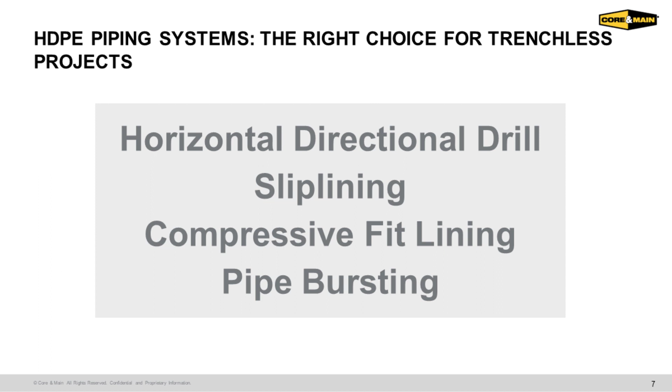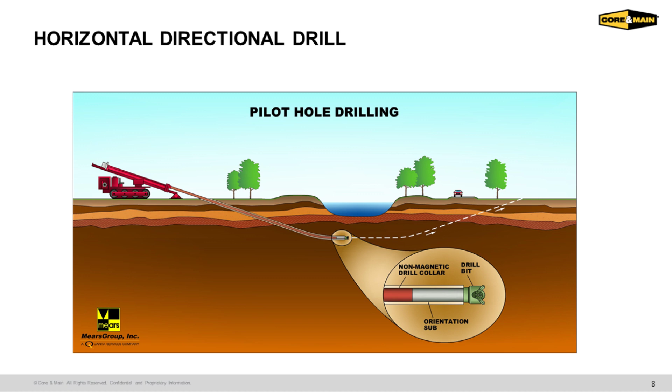Keep going. In horizontal directional drill, essentially we are crossing some type of obstruction, whether a foundation or a river or water body, which is the most common. We are installing a new utility, drilling a pilot hole at a sufficient depth underneath that water body. We make sure during this pilot hole drilling that we're locating where we're putting the drill in the appropriate place. Consulting engineers will design a bore path in advance based on information they collect about that project to make sure we've got a safe and sound route, and then they'll start the process of going through the horizontal directional drill process.

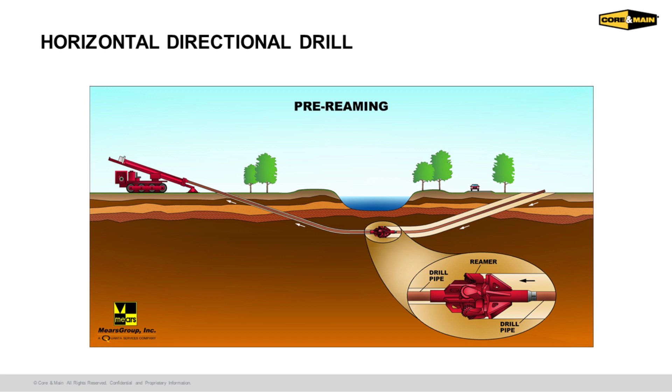Once we have that original bore path in place, we start to pre-ream or cut through that hole itself. Use of bentonite, which is essentially a very moist specific clay with lots of additives that are the secret sauce within the industry, helps us remove material within that bore path so we can start expanding it to the size of the high density polyethylene pipe we're using to replace it or install into that bore path. Once we have sufficient bore path area expansion, we attach the replacement pipeline and pull it back into place. For all of these processes, the limiting factor for the allowable radius is never the high-density polyethylene pipe. It is the ability of the equipment putting in the drill string, and the actual bend radius of the drill string, that limits the ability to install the high-density polyethylene at the depths or curvature we're looking at.

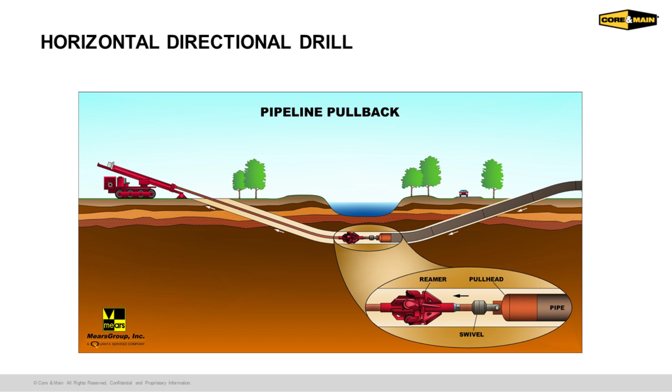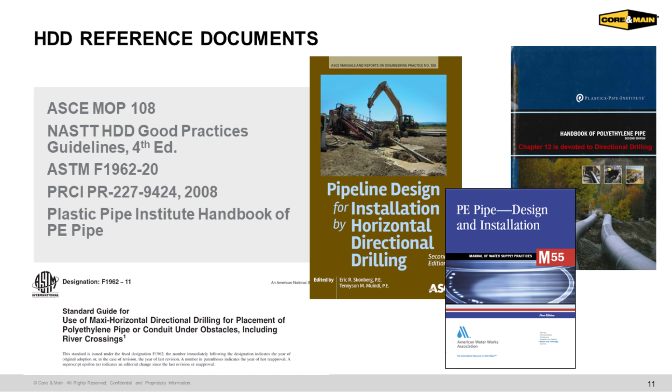Now, when we're looking at very long lengths of horizontal directional drill, we want to look at the tensile forces that can develop within the pullback as we move through that, and compare them to the allowable tensile forces for high-density polyethylene. There's lots of great references for you out there. NASTT's HDD Good Practice Guidelines 4th edition is a great book. ASCE has a manual of practice for you. ASTM standards, there's lots of great stuff out there. The Plastic Pipe Institute Handbook on Polyethylene has an entire chapter dedicated to horizontal directional drill. The Alliance has taken that a little step further, and we have specifications and spreadsheets for you to look at some of the most common calculations you'd be using here.

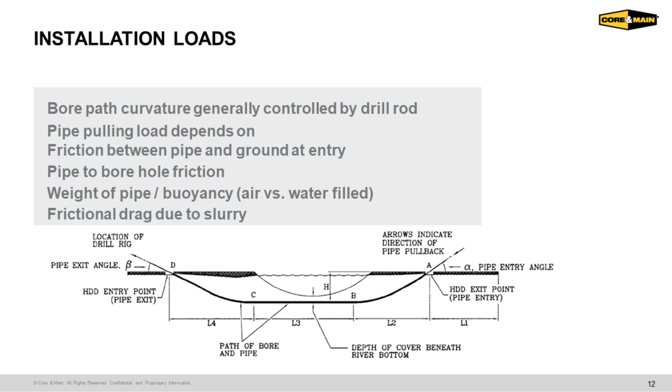So where we're looking mostly at tensile forces as they develop through pulling this pipeline into place is that curvature you'll see developing between L4 and L2, points B and C, where we're looking at friction forces along that curvature. So that's where we want to evaluate pullback friction forces against that curvature and make sure we're able to address that. There are several different techniques, like buoyancy and ballasting that pipe. You could fill it with water to make sure it's heavier as it sinks, which develops less frictional forces as we move through it. There are lots of great tools and reference documents out there to take a look at those forces and what they may be as we develop.

So again, from the process we worked out for the very first 3 slides, we're essentially going to start on one side. The difference in sizing we get to is around 12 to 16 inches. Under that becomes a mini HDD rig, and above that becomes a maxi HDD rig. They all vary somewhat in size and the tonnage they have for these directional drills, but the process is essentially the same as we look through this.

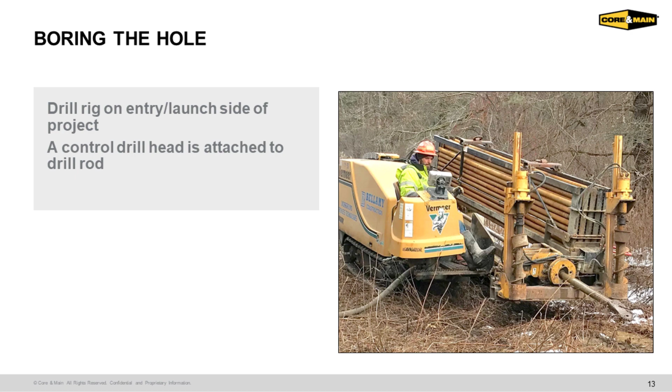So we're going to use that drill rig with drill string. Those are threaded connections as we go through that, so we want to make sure that they stay well maintained and lubricated as we're pushing that head through. Now, this is the smart head at the front of this that's being able to be located as we start to drill that original bore path.

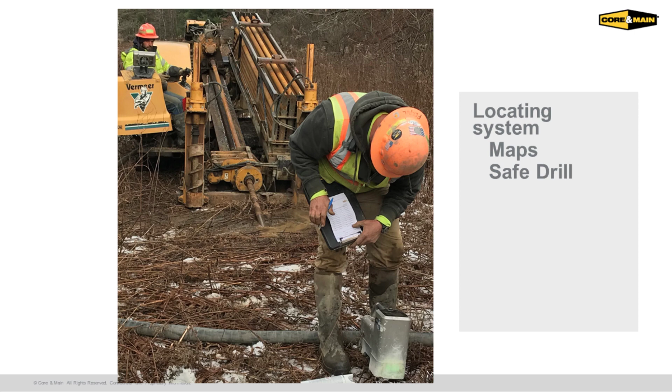What you'll see here is that locating device. It's often a 2-person crew here that moves along. This gentleman with the inspector against the ground is really tracking the vertical and horizontal locations of that head of the drill string as it moves through, so they're able to calculate and see if they're following that designed bore path to make sure the bore path meets the design requirements and bid documents that allow for the specifications of the tolerances for what the drill is trying to achieve.

So while we're looking at this, ductility becomes more important than strength of the pipe as we're pulling through. So obviously when we are starting to get at the end of that bore path where we have the diameter of the borehole reamed to where we want, and we're starting to pull that pipe back through there, there's going to be some lengthening of the high-density polyethylene material as it pulls back.

So when that drill is actually completed, we want to give ample time for the HDPE to relax as we go through it. It's a very common practice to fuse on longer ends of the horizontal directional drill run that we've got, to allow that to relax. Typically that happens in 2 to 24 hours, so we wouldn't reconnect at the final connections in that time period.

But as you're seeing here, 50% of all of the drills we're looking at are high-density polyethylene. That's from small conduit, which is quite often used, all the way up to very large diameter force mains, potable water mains, and things of the like. We'll show a case study on a 54-inch force main here in a few minutes as well.

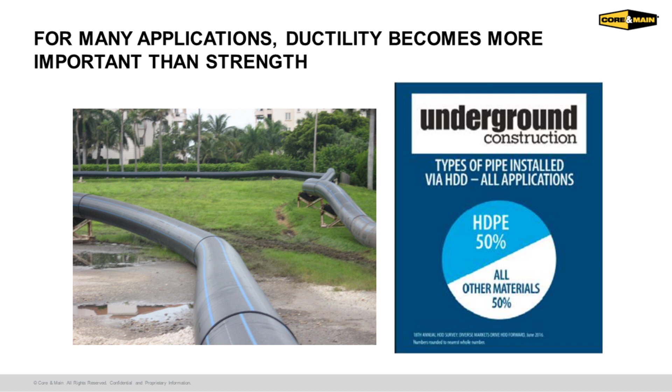So HDPE does allow those tightest curves, lighter and easier to handle during pullback as we're looking. So it's one of the most forgiving and durable products to work with in the field for any installation method.

That's one of the true benefits of not only the design of the material when we're looking at butt fusion, which is actually a fairly quick and durable procedure to fuse two pipe ends together, making that fusion as strong, if not stronger, than the actual pipe itself.

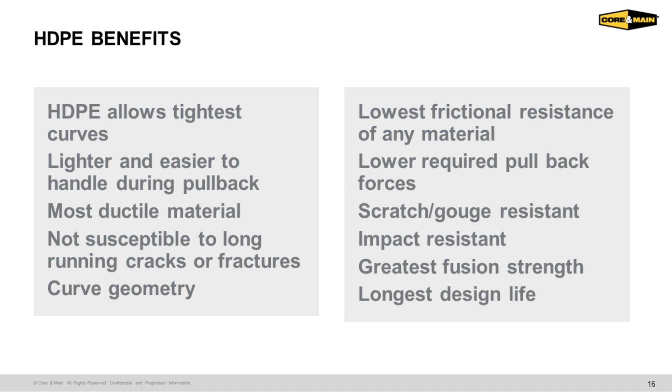That can be redone as many times as needed. So if we find a section that's damaged beyond that 10% gouge we talked about, when in doubt, cut it out, which you'll see a little later. We'll just cut that section out, and then the contractor can fuse that pipe together in pretty short order.

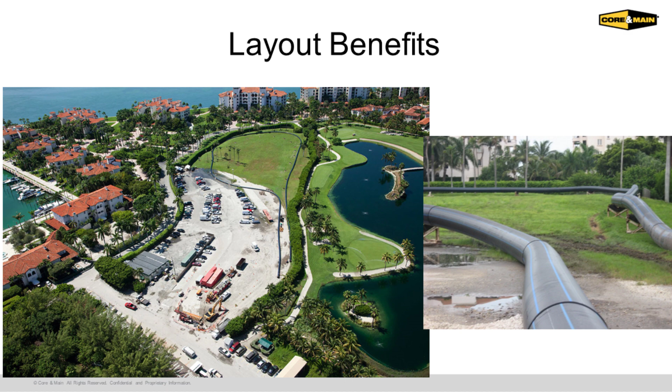Rusty did show you the layout benefits. There's very little to understand about this besides seeing it. What you're seeing is an extremely long pipe string put through in very small areas with tight bending radiuses that allow us the flexibility of the material. We're taking advantage of that material to give us easier installation access. Something with a larger bending radius is less forgiving, it's a larger number, so we'd have to lay it out in a much longer fashion to make sure we have access to install that pipe.

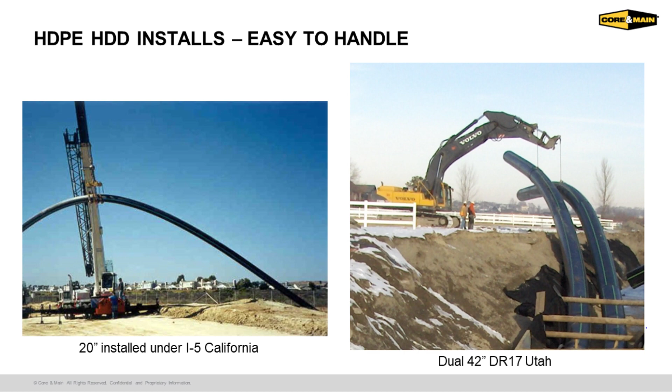We did mention it's easy to handle. These are two examples of the allowable bending radius for high-density polyethylene being very forgiving, getting these pipes into place, and easy to move from the lay-down yard, making sure they have the appropriate insertion path as it gets put into the borehole.

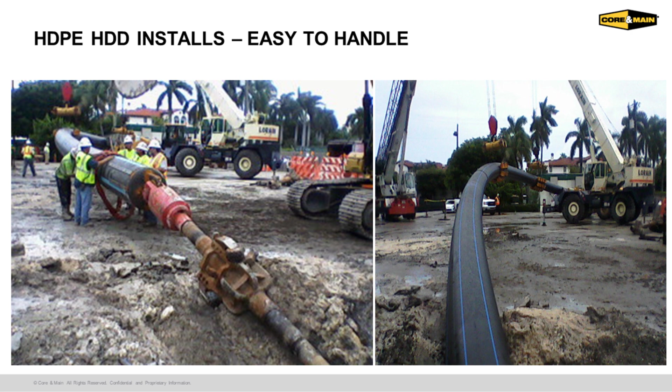Here's a couple other pictures. We're looking at another reamer on the left in front of a swivel that pulls a head through, making sure the front of that high-density polyethylene is sealed off as we're pulling that pipeline through. This will have some rotation as the drill string goes, so that swivel reduces some of the frictional forces and the torsion effect as we continue to pull that into the bore path after back reaming it. On the right is another example of the forgiving nature of the allowable bending radius of HDPE as it's moved into place.

For you consulting engineers and professional engineers out there, this is a planning tool, and you should look back to PPI's Handbook on Polyethylene Pipe, ASTM standards, or other references to do your calculations as you move forward and take responsibility for that bore path.

BoreAid is a very useful tool in that it will compare multiple DR ratings. Now, DR rating, if you're not aware, the lower the number, the higher the pressure resistance. So a DR 11 is 200 PSI, often the industry standard for potable water. A DR 17 for gravity sewers is 125 PSI. BoreAid will compare multiple different DR ratings and look at the tensile force while pulling that into place, and spit back information with references as to where it comes from. One interesting thing about high-density polyethylene is its modulus of elasticity changes over time.

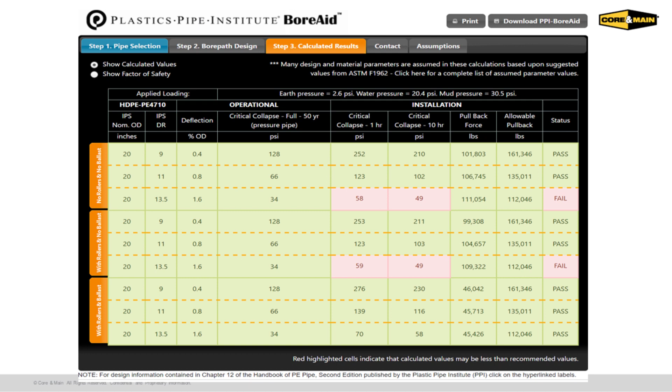When we're pulling that pipeline into place, we want most of this pullback to occur as quickly as we can, but the modulus of elasticity has been established within the industry for the instantaneous figure, 30 minutes, an hour, 2 hours, all the way down to a 50-year lifespan. So all of the calculations are available for you within these calculators and the more advanced tools too.

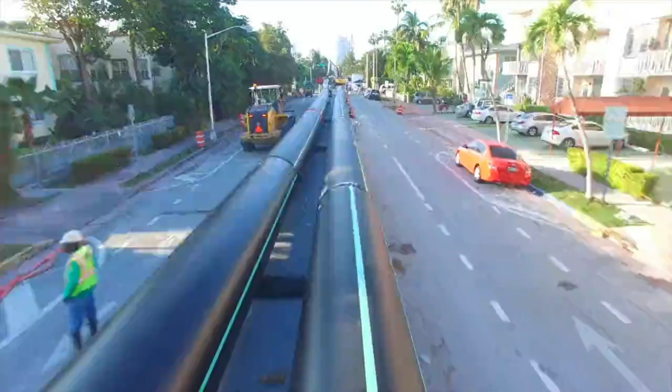Failing, and they did not want force main material leaking onto the shore of South Beach, and what an impact that would be. So they took a risk with the contractor to go from a micro tunnel to a horizontal directional drill and saved probably $4 million through the process, using horizontal directional drill in that application very successfully.

The industry itself is continuing to push those boundaries, and we hear more and more about getting longer drills and larger pipe as we go through this. So the technological limits are expanding. And again, as I said, case studies show somebody's done it at some point before, so we do have those case studies at the Alliance. Rusty, thank you so much for that plug before and giving me a little breather.

So we'll move on to slip line.

Yeah, Rusty, I was going to mention too, the cost savings you just mentioned. I think a big key to trenchless installations is you usually can do these in much shorter period of time. So again, those cost savings, I believe that particular 54-inch project was done in quite a bit, like months less than what they had allowed for the project.

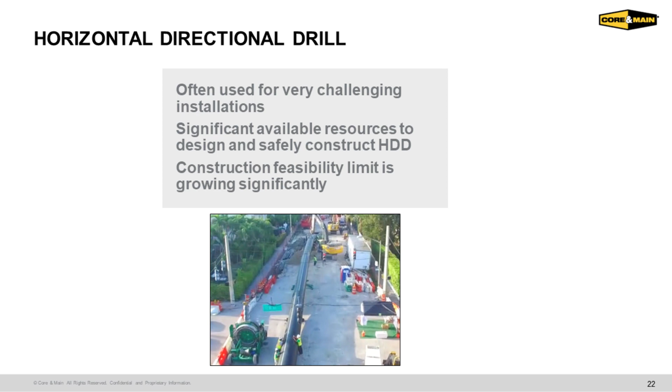So slip lining, we're going to take advantage of a proven conduit location. Slip lining, compressive fit lining, and pipe bursting all take advantage of the fact that we have a proven conduit location. So we're not out there designing from point A to point B and saying I have to have an absolute clear path, or on a contractual method, if my contractor doesn't want to do this job, I have to have something to enforce. So we're really looking at the benefits of having an existing conduit.

We've got to make sure that we prepare it correctly. We provide access in the appropriate places. We provide temporary bypass and other things of that nature.

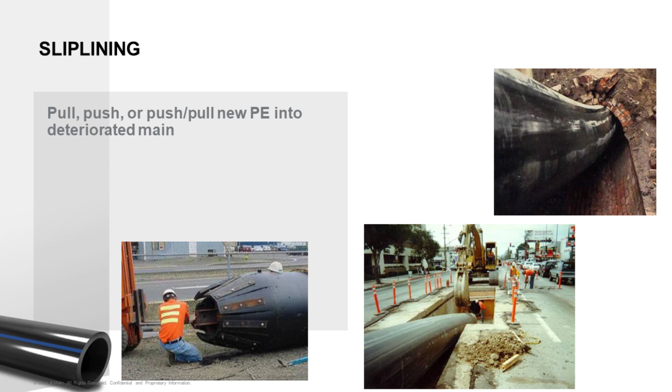So what you're looking at is a field fabricated pull head in the middle. We are going to take a piece of high-density polyethylene through the slip line process and score it to make sure we can get a smaller diameter to start the installation process. We want to make sure we properly prepare it, as you're seeing in the other items here as well. So there it is.

We said preparation is key to successful installation. We want to make sure that it's clean on the inside, and that any tuberculation is removed.

In metallic pipes, tuberculation is essentially corrosion of the interior metallic surface. It builds up a nodule that allows room on the back side of that to be able to go through and do more corrosion. If anybody on the call has seen the inside of a 2 or 3 inch galvanized pipe for small diameter water services on cul-de-sacs, you know what I mean. So that tuberculation continues to neck down to where we almost have pinholes through that pipeline.

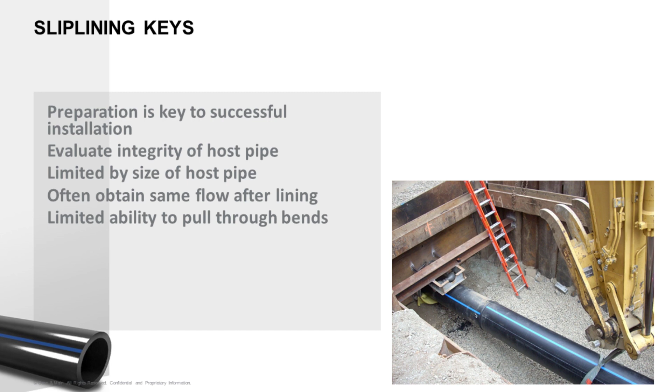So we want to make sure that's cleaned out, so the host pipe can receive the slip liner as we go through. We obviously have a limited ability to pull through bends. So when we properly lay out this plan, those bends, locations of valves, fittings, and tees become another pull pit for us as we're looking through this. We're going to monitor those pulling forces as we go. You can also lubricate a slip line as you would see through this. There are ASTM standards for you to look at the slip line process.

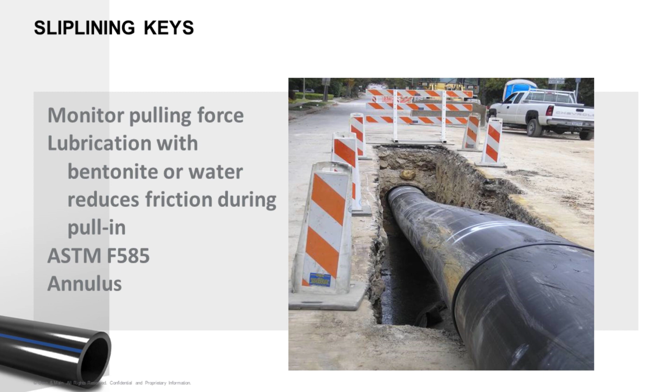And then we're going to get back to another video. So Megan, we've got the 48-inch going into a 50-inch ID steel pipe.

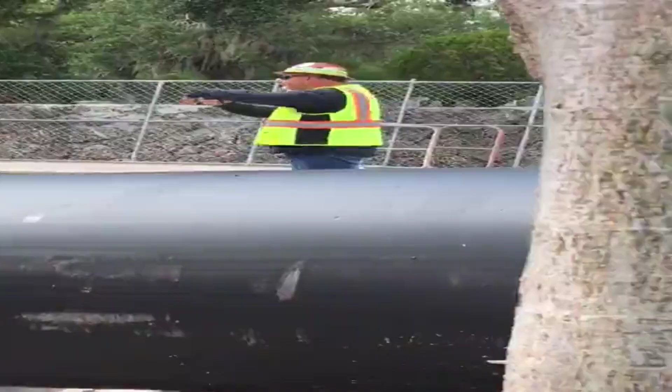Bursting, and the fact that everything we do there has to fit within the ID of that existing pipeline. So we're not allowed to bring in a new pipeline that has a larger ID than the existing pipeline. Pipe bursting, we do have that allowance themselves.

So here we are, compressive fit.

Hey Alan, since they can't hear during the video, you might want to do a quick talk-back over that slip lining part, that it was pushed in and done very rapidly. I think you mentioned it was done in 15 minutes, and I think a lot of people didn't hear that portion of your talk once the video started. So, just to clarify, can you not hear me while I'm talking over it, or can you not hear the video? I don't think they hear you, I think they're hearing the soundtrack from the video. So, thank you.

Well, sometimes not hearing me is not bad. My wife tells me that quite often. So maybe you guys, after a while, get tired of hearing me.

Essentially, what we did in the slip lining video I showed you is we're putting a 48-inch OD pipe into that 50-inch ID steel pipe. We make sure that annular space is still there, that steel pipe was cleaned and allows us to pull free of any obstruction into that pipeline. We fuse that long run in advance at the laydown yard or wherever we may be able to pull it in, and once we start that process, we don't want to stop.

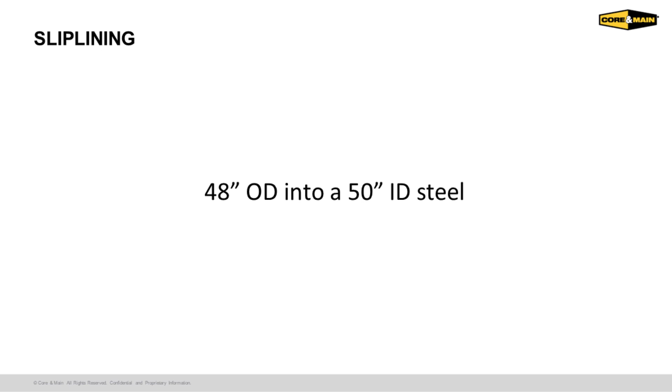Oftentimes in trenchless technology projects, most of the work happens to be the preparation - that's fusion of the high density polyethylene in the laydown yard. By the time people are performing any work in front of residents or homeowners, the actual process of pulling the pipe into place where they'll see construction activity is minimized. That's another social benefit we see through it as well.

So, compressive fit slip lining. Now, high-density polyethylene is the only pipeline that can be used through this. What we're essentially doing is we're taking a larger OD high-density polyethylene pipe than the ID of the existing pipeline. Then we temporarily reduce the OD of that high-density polyethylene pipe, pull it into that smaller ID pipeline, and then allow that high-density polyethylene to relax and conform to the inner surface of that host pipe.

So these can be structural, semi-structural, so can a slip line through that as well. But here we're resulting in no annular space, and we're really taking advantage of much longer pull runs, to where we're seeing sometimes 92% less excavation.

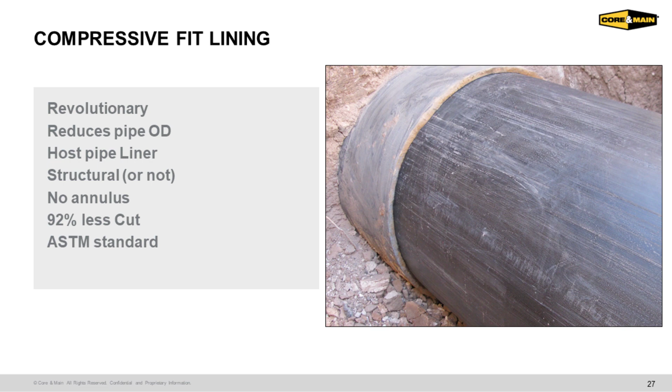The project I'm looking at for compressive fit slip lining is these transmission lines of larger diameters that are pre-stressed concrete cylinder pipe, or some other type of pipeline with multiple components that cannot be pipe burst. The longer lengths between valves and control valves in a transmission main gives us higher productivity as we go through. So those are some things to keep in mind when evaluating your rehabilitation projects - this is one of the prime successes for compressive fit slip lining for transmission mains, large diameters, pre-stressed concrete cylinder pipe that may very well be failing early.

So here's a little animated GIF in the slideshow. I hope you can see it - if not, we'll walk through it in a picture in a couple minutes. But again, we're temporarily reducing the OD of that pipeline through either a die reducer, or they have multiple methods to make sure this moves through. And then we're pushing or pulling that pipeline through the existing pipeline and continuing to go through as we see here.

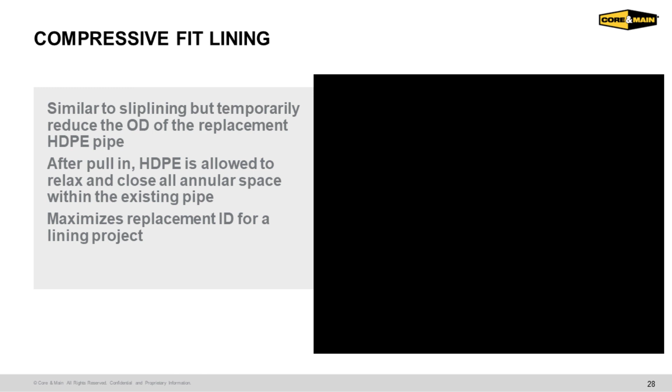So we've got some confirmation that you guys can see the video. That's awesome. Of course, videos make everything that much better, and so do your questions, by the way. We are on question number 38, so it's continuing to go and go, and I love it - it's fantastic for us.

Here are some more of the functionality of how we're looking at getting that into the existing pipeline. There's a reducing die, a towing head, original pipeline as we see, and imagine that the forces put upon that reducing die and towing head are fairly large, especially in comparison to a slip lining project or a pipe bursting project. So we often have to reinforce the interface at the soil surface when we're starting to push that pipe through, and we've had that die reducer lodged and secured up against either our shoring or a concrete dead man in some instances.

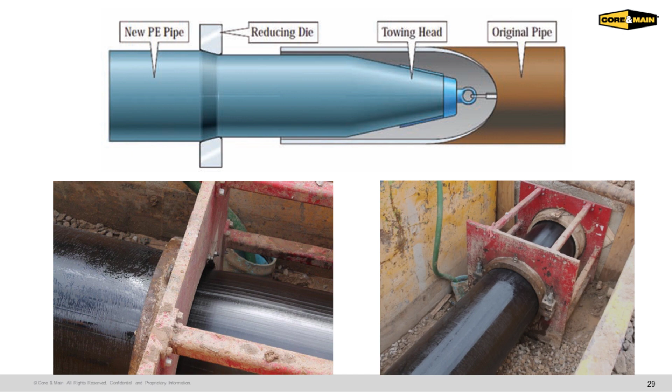What you'll see in the bottom left picture is actual oil that's sprayed onto the pipeline to get it lubricated and start to go through. You can use canola oil, or if you like olive oil it'd be a little bit more expensive, but you can use any type of oil to spray on that pipe and keep that process rolling as we go through.

We just had a question from Gabriel Pena: can the pipe get stuck in the compressive fit lining method? Gabriel, the pipe can get stuck in any of the trenchless methods that we're talking about.

So it's that mitigation of the getting-the-pipe-stuck program that has to work in our favor. Every supervisor and foreman on the job that does these projects understands that, and they have a plan ready for this. So in the act of compressive fit lining, if something goes wrong, we didn't clear that obstruction, or we have some type of failure in the mechanism of the pulling operation as it goes through, that becomes another point of excavation where we now have to dig down, remove that obstruction, and continue the process.

In the case of horizontal directional drill, obviously we can't easily dig down in a river, so they'll try to bring in larger equipment and continue to move that pipeline along as we go through.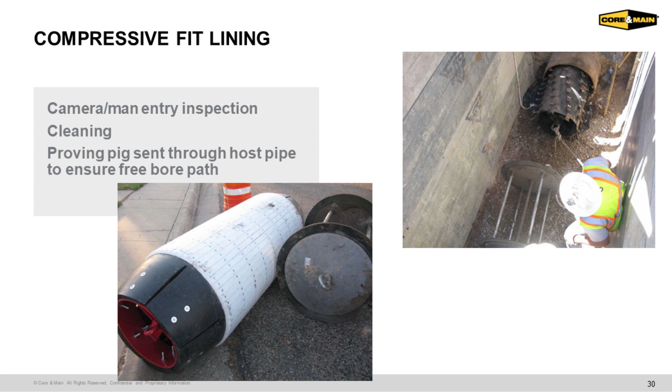Great observation, and on question 41 you guys are sticking right with us and continuing to ask, and I love it. So here's just another example.

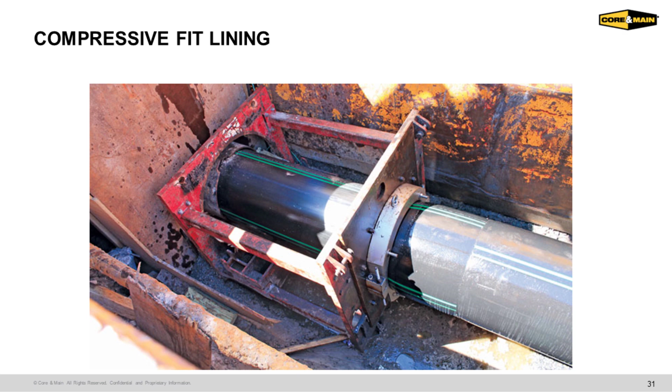All right, I love compressive fit lining, so obviously I've been talking about it too much. Let's go straight to one of these that'll show you directly with dimensions so you could see what I'm talking about. So we are taking a 32-inch HDPE OD and putting it into a 30-inch cast iron host pipe.

29-inch HDPE under tension. That material does go somewhere. The pipe does lengthen as we put through this. And then again, we have the relaxation of that pipe within that 2 to 24 hour time period.

I've seen a compression fit lining process stop its advance from equipment failure, and that relaxation period occurred over a 2-hour period at this die reducer. It was amazing to see.

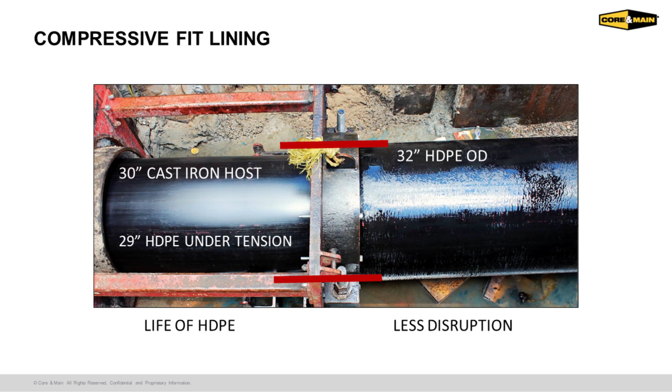This does not harm the pipe. This does not do any damage to the pipe in a long-term effect at all. We're fitting within the allowable radius, the allowable deformation, and yield of the pipeline as we move through it. And again, HDPE is the only pipe material that can do this for you, to maintain that largest ID through a lining process that we could possibly muster.

So I'll get into pipe bursting. I myself have designed over 45 miles of pipe bursting projects. So I have done a lot of this before, and there are a lot of things that you could do out there. Get out there and pipe burst.

It's pretty simple. For pneumatic pipe bursting, high-density polyethylene again is the only pipe material that can be used for that. Similar to compressive fit lining, but this is pneumatic. The reason this happens is that an impact hammer is used to break this pipe as we're inching along through the existing pipeline. It's connected to a constant tension winch, which fully aligns that expander head up against the face of the existing pipeline. Air compression is put through an air hose, and then we're just breaking that existing pipeline incrementally through it.

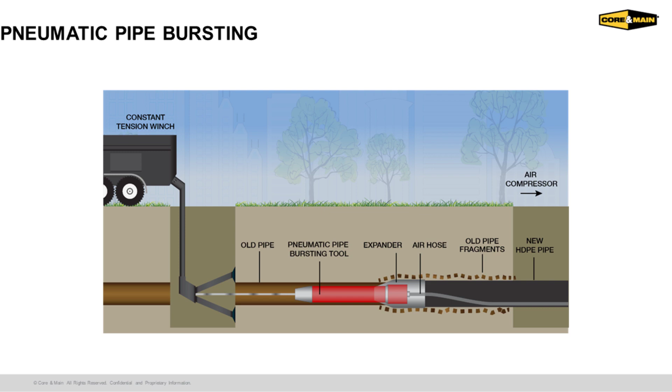Gravity sewer pipe bursting is the number one pipe bursting method throughout the United States. It can only use high-density polyethylene. The city of Houston is one of the largest consumers of HDPE on its gravity sewer side, at almost 80,000 plus linear feet a month to replace its gravity sewer systems as we go through.

Here's some tools for you. This is a pilot connected to an expander head.

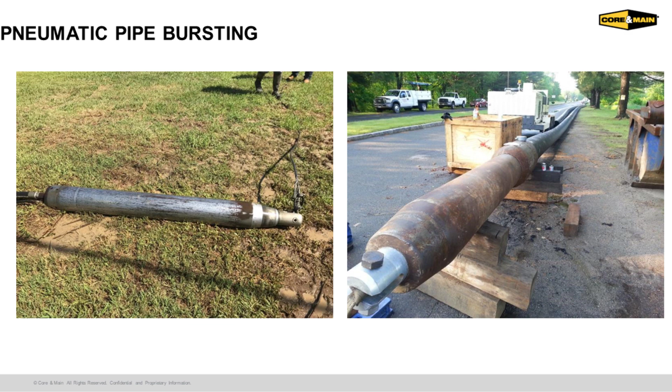What you'll see on the left then becomes just an impact hammer that has yet to be connected to an expander head. As that project diameter goes up, so does the size of equipment as we're moving through it. We're continuing to connect that expander head to the high-density polyethylene through a whole litany of different screws, as you're seeing through these pictures.

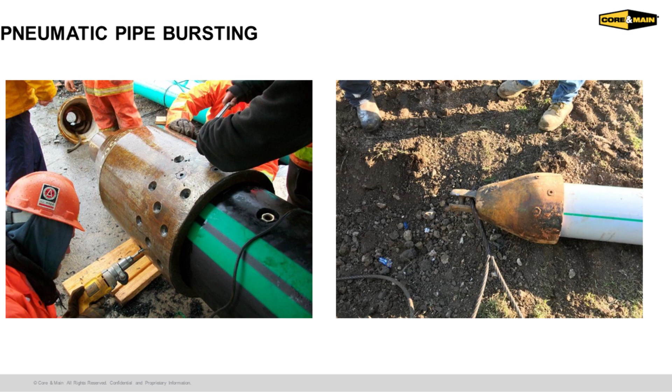The one on the left also shows you a lubrication port behind it, as in this case we're putting a hose through the pipeline and pumping lubrication through to help reduce the friction.

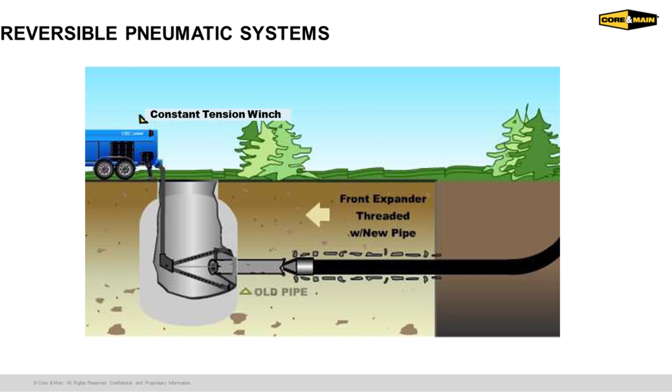Pneumatic pipe bursting has the luxury of having, in some instances, one less excavation, as we're able to advance that impact hammer and expander head through to an existing manhole. We still have to excavate on the opposite side of the launch pit where we're going to start it. Then we'll remove that expander head from the impact hammer out of the existing manhole, and then back that impact hammer out through the product pipeline. So we can end up with even one less excavation than we have through a regular pneumatic system.

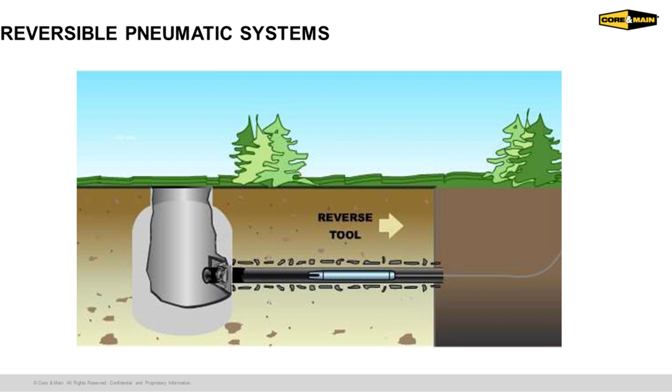You do have to excavate down to reinstate the service connections. One of the true benefits of high-density polyethylene is those can be electrofused at that situation, so you'll have a seismically resistant or soil displacement resistant service connection that is hard connected. We also make sure there's no moisture getting through there, unlike CIPP, which can oftentimes, if that grout breaks down over time, let moisture through.

Static pipe bursting is often used for potable water mains. It uses a hydraulic power pack.

Just want to jump in real quick. Again, for our listeners, one of the other main attributes of doing this pipe bursting is if you've got asbestos cement piping in your system, pipe bursting allows you to leave that pipe in place. It becomes a hazardous material once it touches the air or comes out of the ground, and then you've got a problem. By using pipe bursting, you're minimizing the hazardous waste you have to dispose of, so it can be a definite solution. I'm kind of preaching to the choir here, Alan - I know you've written a book and done quite a bit on that particular thing, but I think it's important for the people with us today to hear that. It's one of those extra benefits that really can help you.

Absolutely. AC pipe bursting can be done legally in accordance with regulations and has been done in Florida, Michigan, Texas. It's been an approved alternate process in the state of Vermont and also in California, in the Bay Area. Everything that's shown for air sampling during the pipe bursting process has come back negative for exposure or release of potential asbestos fibers.

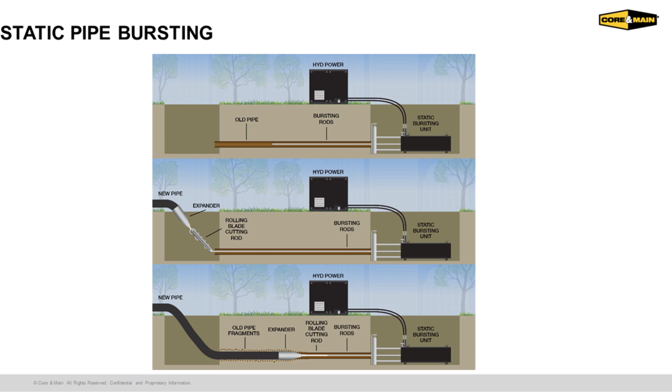So I'm going to run through this. We've got a whole lot of material still left, and the questions are coming great. So we're at 49 right now.

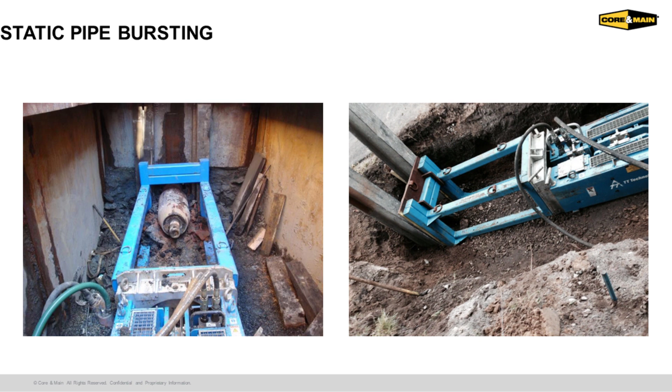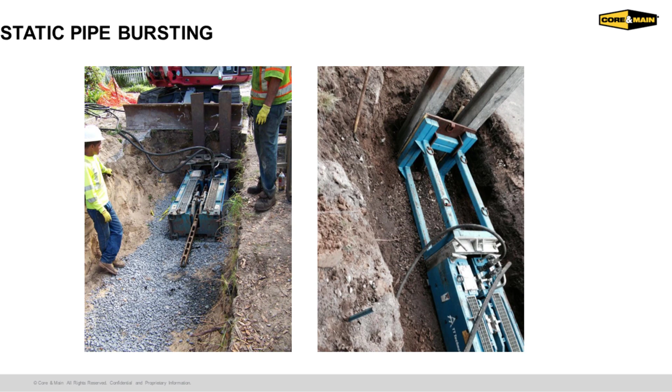These are just extraction cages where you can remove the equipment on a static pipe bursting rig right in front of the machine, the pipe bursting machine that does all the work for us. Then here, for pipe bursting in suburban or urban environments, I liken the excavations to surgical excavations. So when we go through developed neighborhoods, based on the depth of the connection we're seeing, we get really, really small in some of these, dramatically minimizing those excavations.

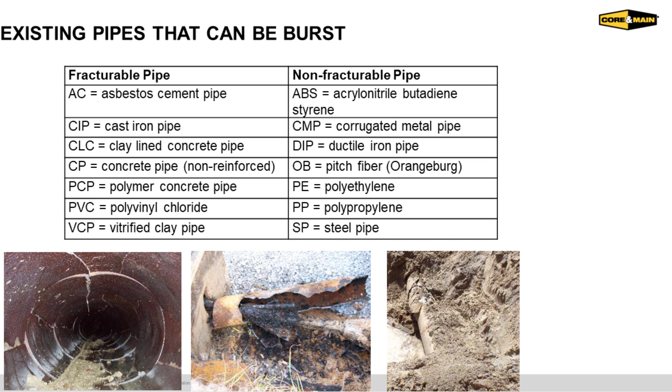Existing pipes that can be burst, here's some lists for you. They're broken into fracturable materials and non-fracturable materials. The way these pipes fail and the apparatus we have to use to split them, cut them, or otherwise treat them prior to the expander head coming through is different. But there's a tool for everything, and the pipe bursting community has figured out quite a bit of this for you.

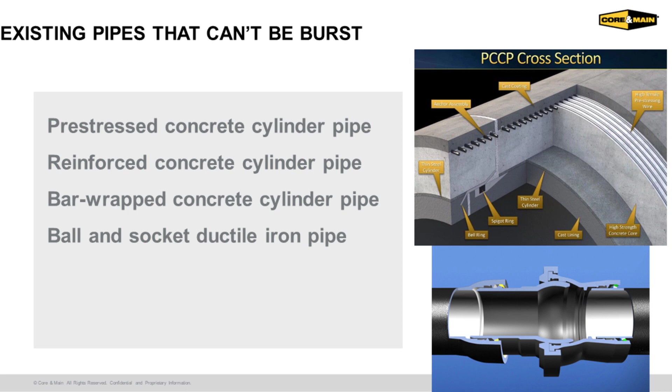I talked about pre-stressed concrete cylinder pipe. It is an interactive pipe that has multiple components, and a lot of that is reinforced. It cannot be burst in that manner.

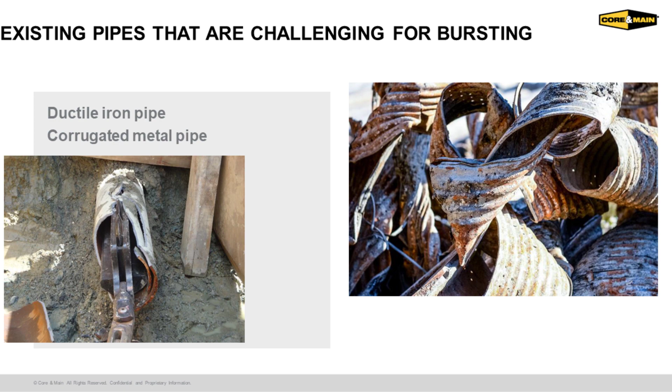Challenging for bursting are going to be ductile iron or corrugated metal pipe. As you can see in the picture on the right, some of that corrugated metal pipe accordions up. It has a lot of stored energy. While it pulls off the head, we have to cut it, and then it could release that energy as we're going through.

Range of diameters and lengths can be done up to 54-inch and long pulls. But the system we're rehabilitating defines the lengths for us. In gravity sewers, we're looking at 300-foot manhole spacing, which becomes an excavation, or if we have a reversible hammer, that saves us an excavation. In potable water distribution systems, the presence of the valve stops us from bursting through it. So that's a 300 to 500-foot length.

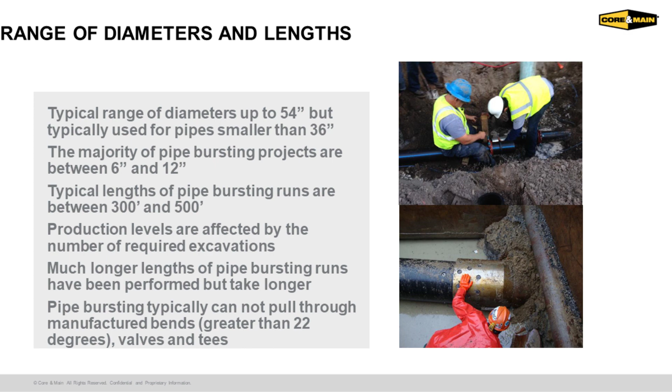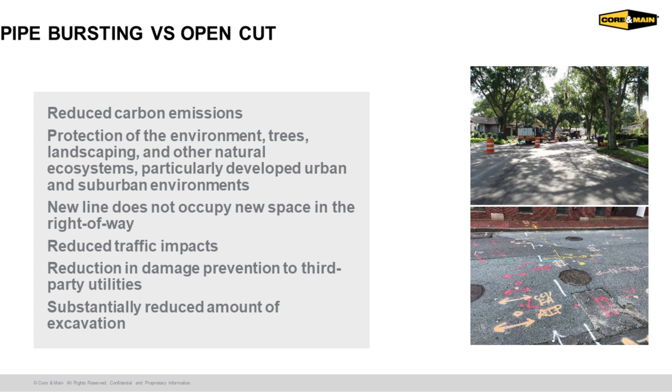We want to make sure these crews are as productive as we can, so we drive the cost of construction down as we go through. In pipe bursting versus open cut, I use the term surgical excavation. There's also a lot of other great benefits, like reduced carbon emissions and traffic impacts. We've talked about a lot of these already just based on trenchless technology alone.

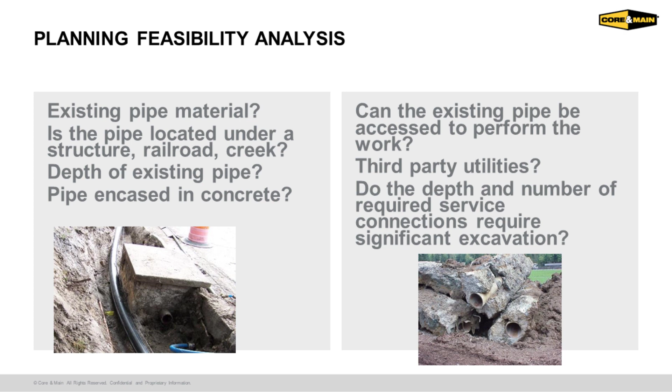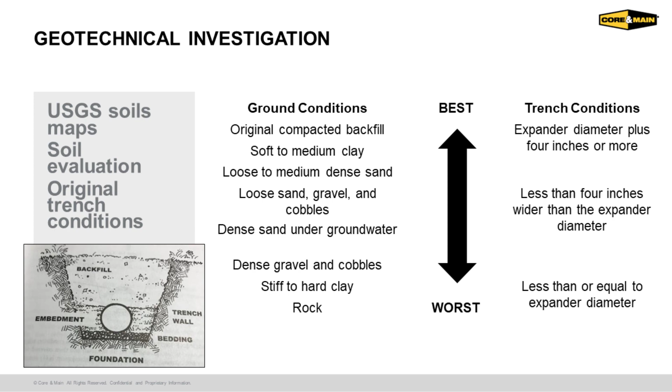Some of the best conditions for us geotechnically are original compacted backfill. Worst conditions are going to be rock. Obviously in a carved rock trench, we can't displace that material somewhere. So we're continuing to look through trench conditions as we move through.

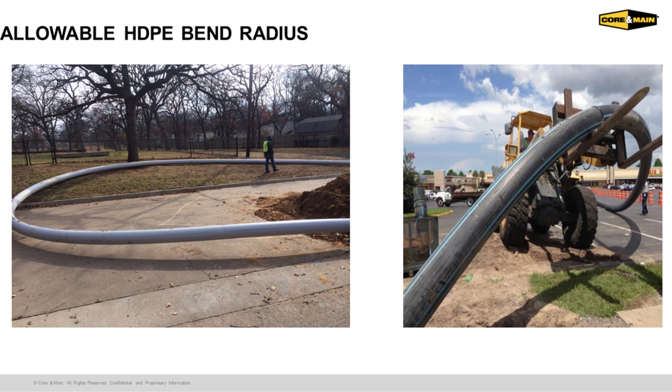That allowable bending radius shows for us in moving that pipe from the laydown yard to the actual interface of the pipe bursting mechanism, and allows us to have the best, most forgiving radius as we put that pipeline into place.

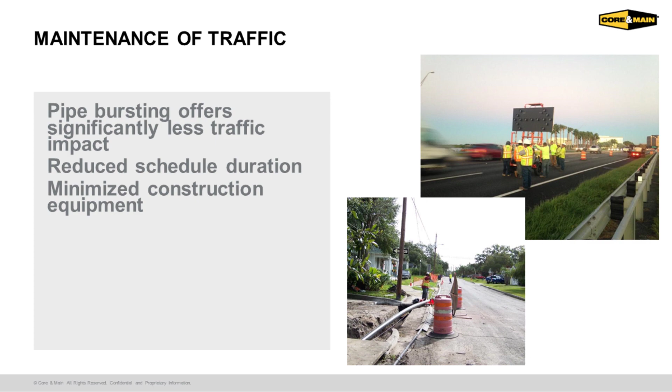Maintenance of traffic sometimes is still a consideration while we're doing these trenchless projects. What you'll see in the right picture here is a project for the City of Tampa, where we did pipe bursting underneath a heavily traveled roadway that had 76,000 average annual daily traffic. We did the work at night from 7 p.m. to 5 a.m., and then took the construction schedule and reduced it from 6 to 9 months down to 3 weeks. So we're taking advantage of significant time savings through trenchless.

I'm going to continue moving through this pretty quickly, and in another couple of minutes we'll wrap up with some of the best, or at least most poignant, questions to the process itself. Temporary bypass is one of these processes.

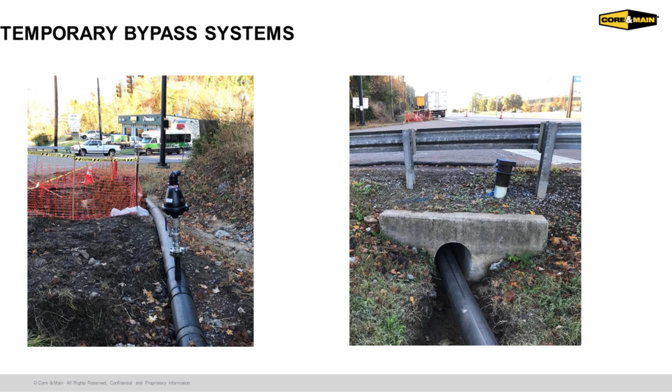They constantly use high-density polyethylene pipe throughout the temporary bypass process, and contractors can get pretty creative as to how they push their systems through and maintain that service during rehabilitation of the pipeline itself. I know you're curious about connections. There are lots of different ways to do service connections and mainline reconnections: electrofusion fittings, mechanical fittings, and other things of that nature, and the industry itself has innovated fairly substantially.

Rusty, do you want to come on and tell what Core and Main has as far as the available inventory for everybody when they're starting to look at starting their own trenchless projects?

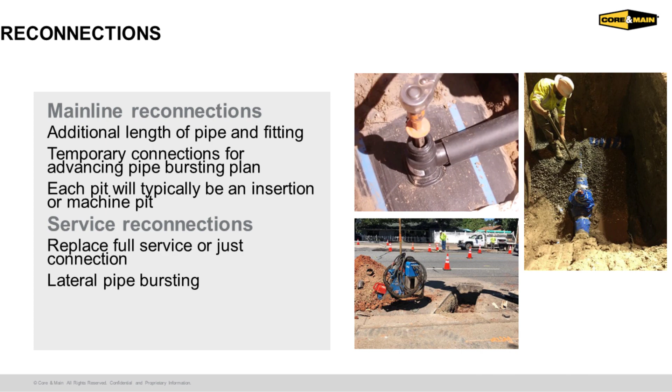Sure, we're happy to help with anything and support any projects you have. Once you determine what you want to use, we can do anything from electrofusion, like we're showing there. Fusion is always going to be the number one connecting method when it comes to polyethylene — I think that's definitely your best bet. But you've got mechanical fittings as well, tap saddles, and a combination that's a hybrid of the two. Probably the best thing to do, in the interest of time, is contact me. We'll be happy to get you hooked up with our local branch near you and come up with the best solution for what you're trying to accomplish. But we can do mechanical, electrofusion, or a hybrid between the two.

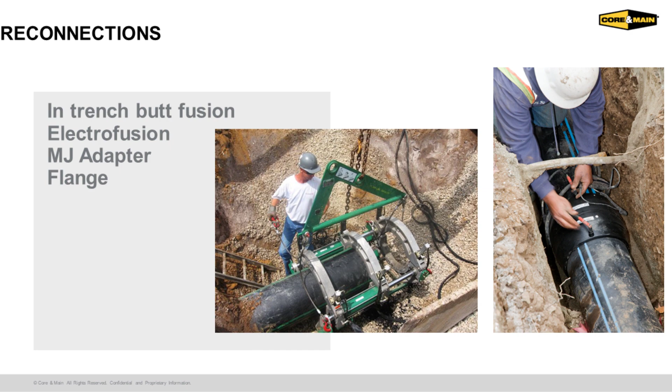And of course we always like to see fusion, and that's one thing we didn't really cover a lot today. Hopefully most people are familiar with polyethylene, but that fusible joint gives you a zero leak rate. You're not putting in an allowable leakage rate from day one that only gets worse over time. So again, another huge benefit to polyethylene.

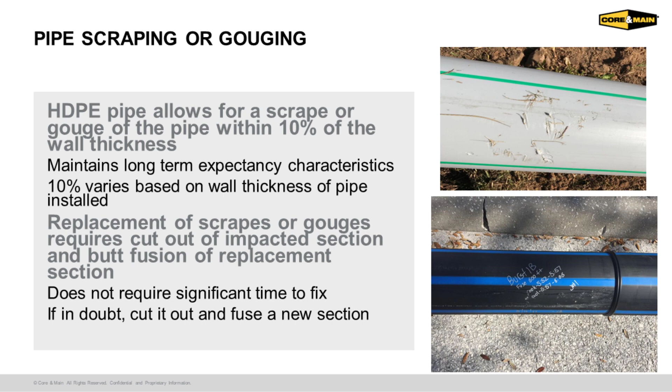Pipe scraping and gouging, we talked about that. 10% allowance for most of the pulling over the roadway surfaces. Those are going to be okay gouges as we looked at.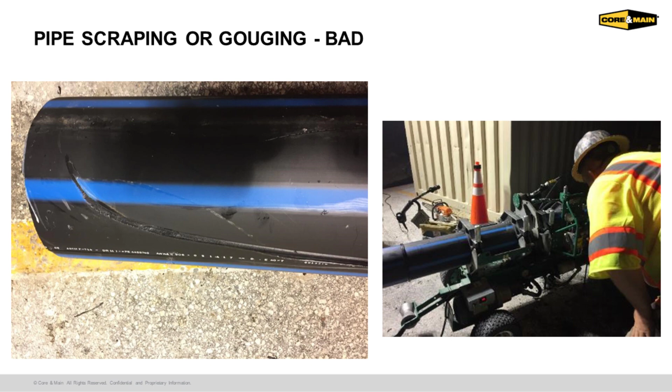Here's an example of a gouge that is bad. This one we discovered at 3 a.m., and I said, Chin, who's the supervisor in the job, when in doubt, cut it out. In the process of using this 8-inch pipe, after we cut that joint out, a 5-foot section, it was really accomplished within 20 minutes, and the pull continued. So here we use dry chainsaws, which do not contaminate that pull itself, and then we just advance the process through that.

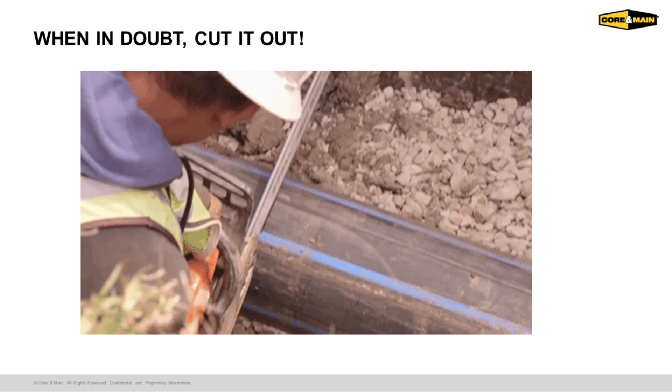But this one focused a lot more just on trenchless technology, and Rusty was right on the money there, hoping that you guys knew a whole lot more of high-density polyethylene. And some of those fusion questions, material questions weren't really right on the forefront for you. But if they were, we do offer 101s, 301s, lots of different other webinars through the Alliance for PE Pipe to be able to come through.

So, Pete, hey Alan, Rusty, did you talk about the engineers package? I briefly at the very beginning, but here again I'll talk about it here as well. Just email any one of us, and we'll give you a whole lot of comprehensive information on the design calculations, the references as to where some of these came from that we are able to give you that are free, and then also specifications that the Alliance maintains, typical details. We also write typical details and create them for you in AutoCAD if you have a preference, that's something that's not included in the package and want to see that as it's done.